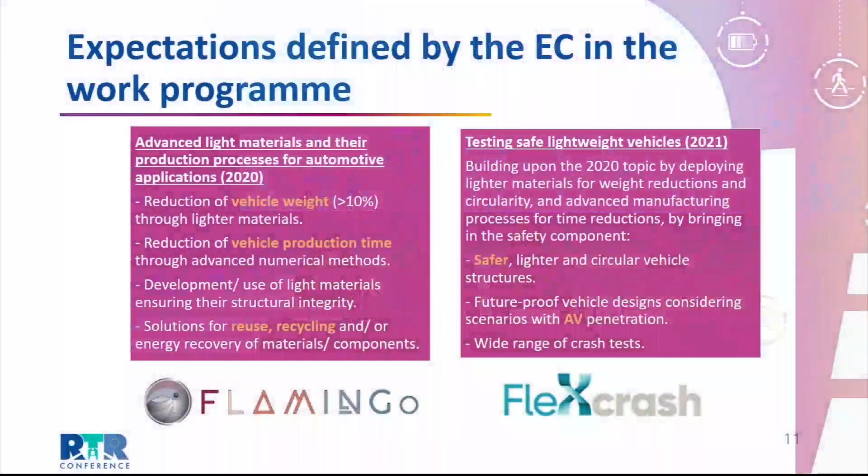There is a focus to better understand how materials from which we construct vehicles can be lighter, more circular, and overall greener. There have been two calls for that, one launched in 2020 and one launched in 2021. We see there is a follow-up: we started in 2020 focusing on trying to reduce the vehicle weight, setting the target of achieving at least 10%, but also reducing the production time and facilitating a faster production process.

Then the next year we have a new set of projects also focusing on lightweight and advanced materials for the automotive industry, but they also incorporate the aspect of safety. Safety, very specifically looking some years ahead, focusing on automated vehicles, what will be the situation there, what would be the safety issues, and how a car should be manufactured to tolerate those safety issues. So this is a bit of an overview.

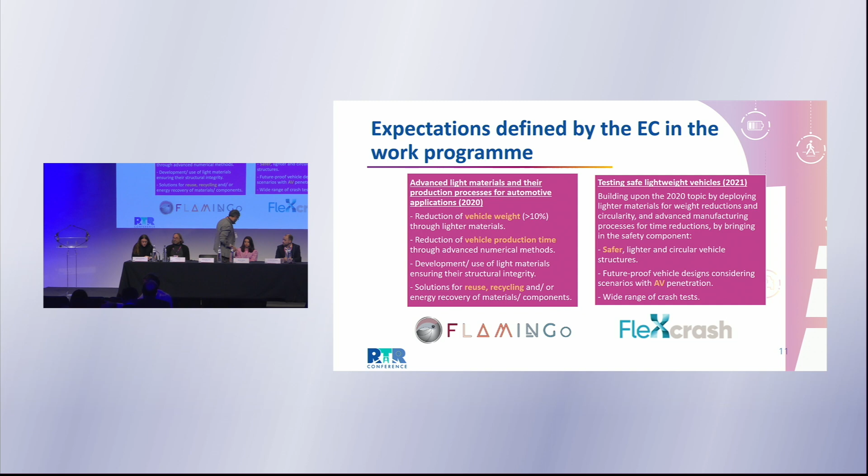Thank you. Good morning, everybody. FLAMINGo, as already said, is focused on bringing metal matrix aluminum nanocomposites into vehicles in order to identify the pathways to reduce the weight of the entire vehicle.

I'm here with my colleague Raquel Riccio who will talk more about the results in terms of LCA. But now a bit of numbers that regard FLAMINGo: we are 11 partners, and the project started 4 years ago and ended a few weeks ago.

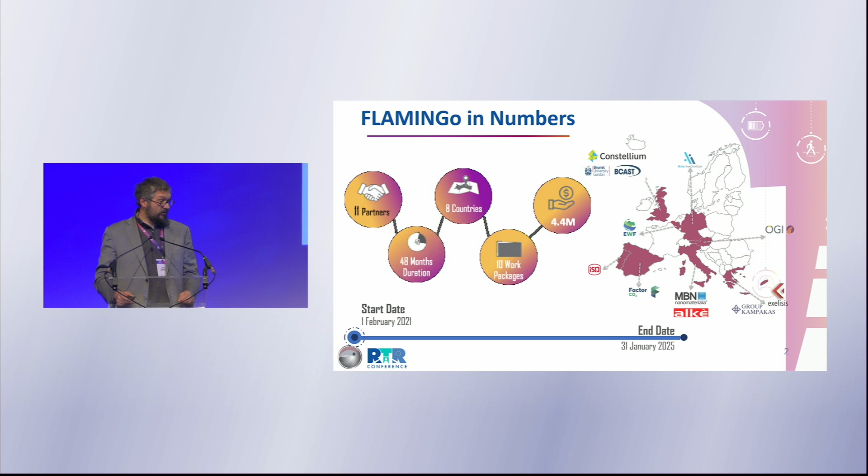This is a consortium in which there are a few universities, actually only Brunel university, and a couple of technology transfer research centers, one in Austria related to foundries, another in Portugal related to welding, and all the other partners are industries in the field of materials. That allowed us to have an overview of the entire life cycle of these materials and their implementation into the cars.

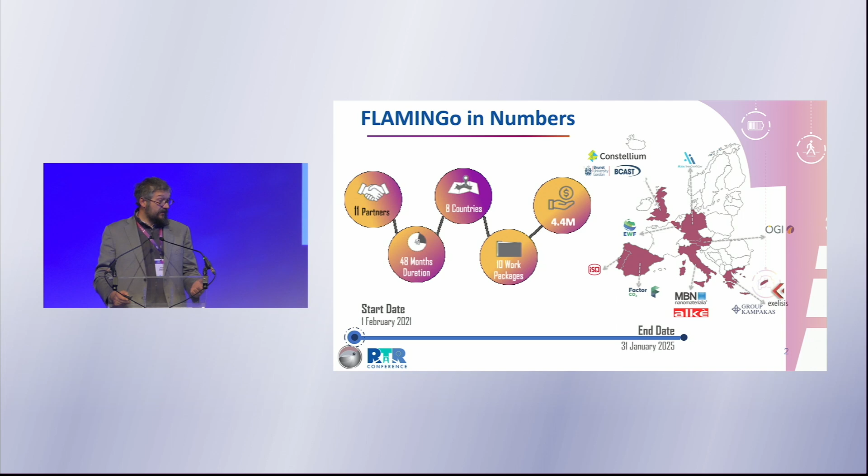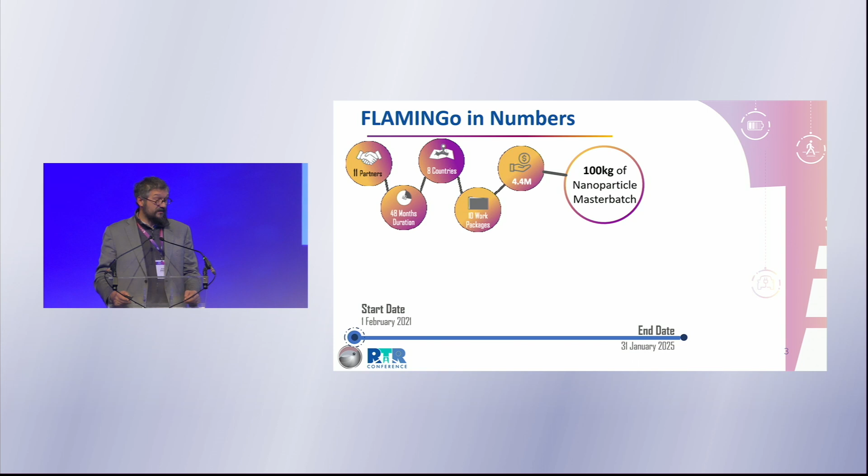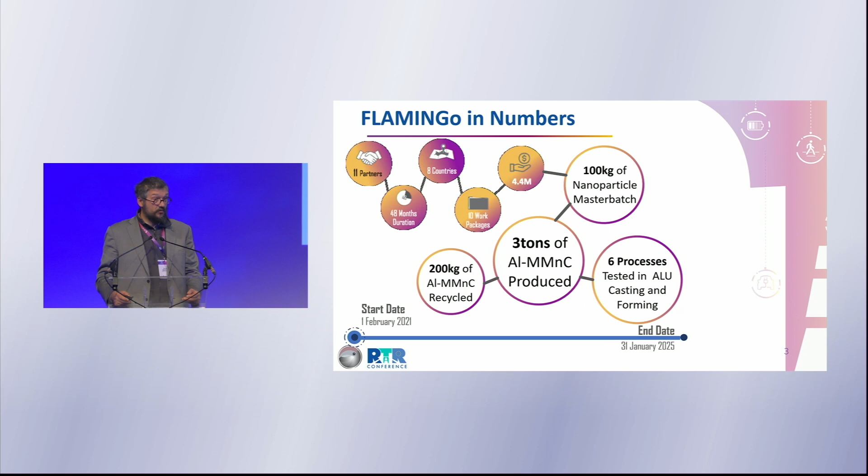Thanks to the fact that we are at the end of the project, I can give you also some more numbers. For example, 100 kilos of nanoparticle master batches have been produced, and this delivered 3 tons of aluminum metal matrix nanocomposites that have been produced and used throughout the process. Also, 200 kilos of these have been recycled to test all the implications around that, and 6 processes related to aluminum manufacturing and processing, casting and forming, have been used and tested throughout the project.

This led to a total of 4 components that have been installed in the vehicle. I have one of the components on the table there. It's a steering knuckle, and this allowed us to do some calculation on what was the actual reduction on the vehicle, and also some projection on what this can mean for the entire vehicle.

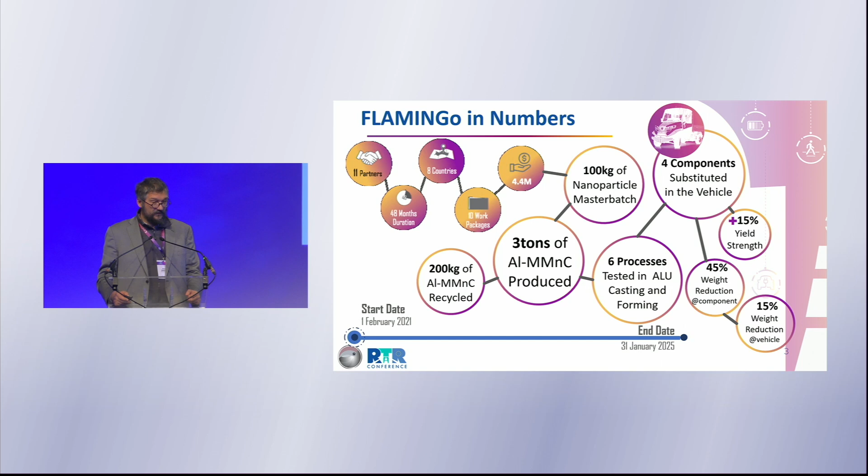At component level, we reached quite high weight reduction, but of course one component is not enough to reduce the weight for the total vehicle, since the target for this call was to reduce the vehicle weight by 10%.

FLAMINGo was focused on one material, which is the introduction of aluminum enhanced by inoculation of nanoparticles. The idea was we can substitute part of the steel structure, the steel component in the car, and obtain an actual quite substantial weight reduction.

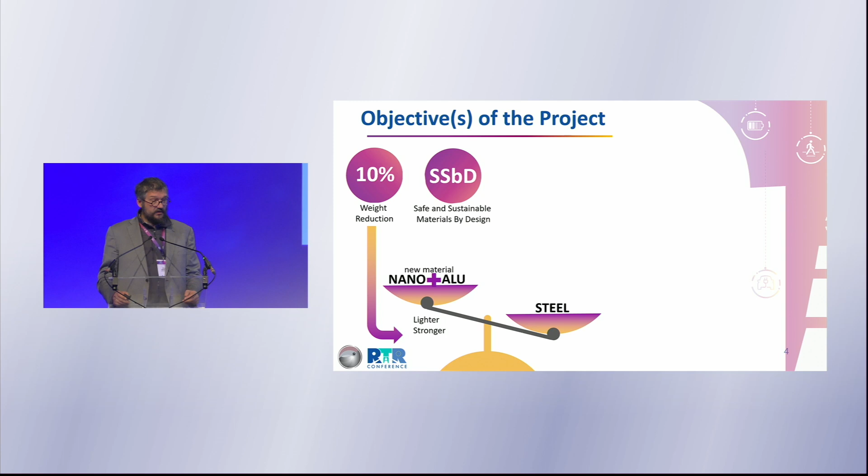But of course, the inoculation of nanoparticles brings a lot of questions around the safety for workers in the value chain of manufacturing the cars and manufacturing the components, and sustainability from the point of view of the cost of these nanoparticles. We had to test for this the entire manufacturing and life of these components, from cradle to grave and back to cradle. We wanted also, and we succeeded in including these components in a real vehicle and tested for some 100 kilometers.

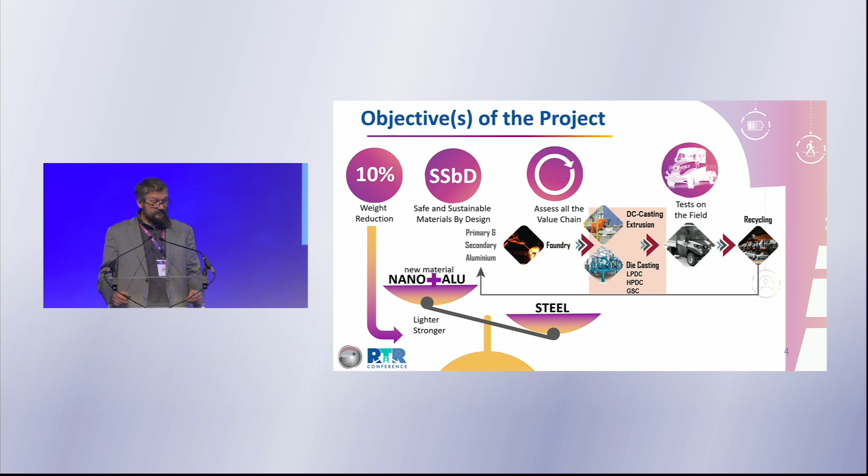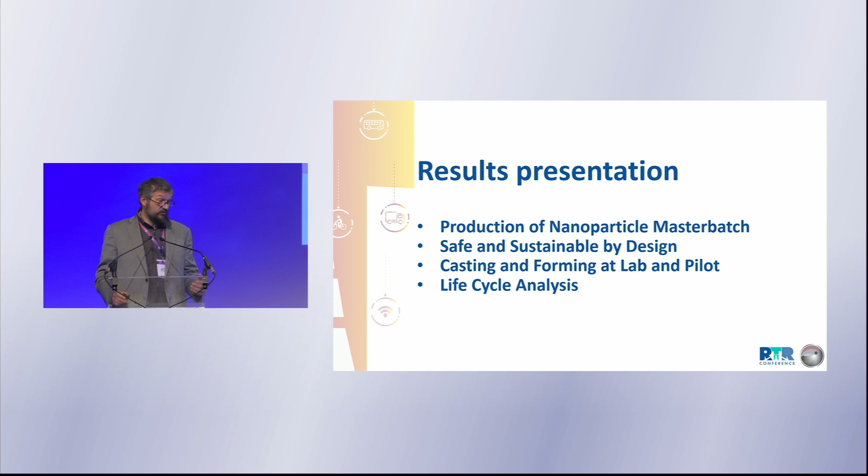So I will focus the rest of the presentation on some of the results that we achieved, because 4 years cannot be squeezed into 15 minutes. One of these is about the approach that we had.

Safe and sustainable by design is something that we wanted to exploit as much as possible. So we concentrated on 3 kinds of nanoparticles that were there since the conception or inception of the project. All of these had pros and cons.

Silicon carbide has good density compatibility with aluminum, but cost for the nanoparticles is quite high. Titanium carbide, on the contrary, is problematic from the point of view of density compatibility, but cost is lower because we managed to develop a process to make the titanium carbide particles directly into the metal matrix.

So we obtained highly concentrated master batches of aluminum with nanoparticles that can be safely inoculated in a different process of casting and then forging extrusion of aluminums.

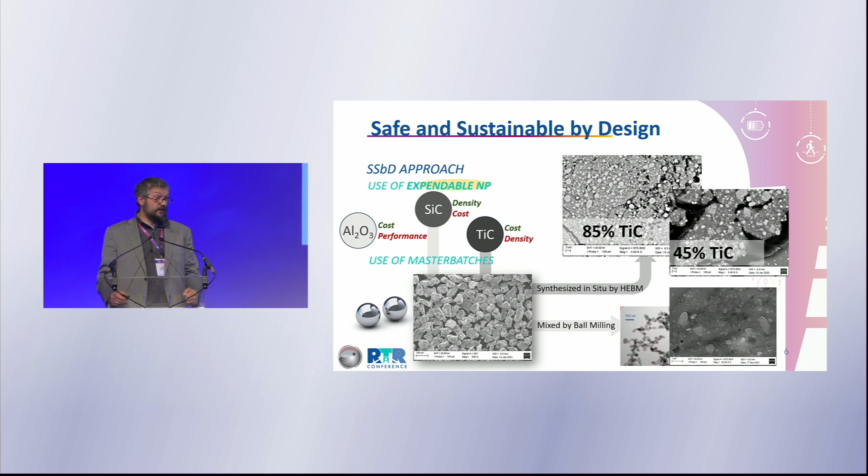Similarly, the idea is also to take on the market nanoparticles, silicon carbide in this case, and mix it with aluminum at solid state process, in order to create these master batches that can be, again, inoculated in casting and then forged and extruded.

This process, we as a company, dealt with. We used mechanochemical alloying at solid state, in one case, to create the nanoparticles of titanium carbide. In the other case, to obtain a predispersion of silicon carbide and aluminum. I didn't talk about aluminum oxide, which was scrapped quite soon.

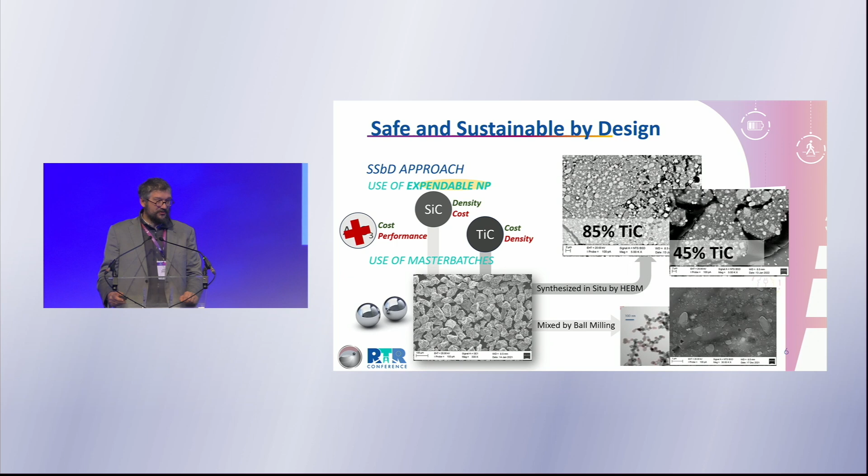In the project, we had to verify 4 hypotheses, one of which is that the addition of nanoparticles does not compromise existing recycling processes. We don't want to put in the market something that can mess up the currently existing practices.

So we want to check that these nanoparticles can be completely removed from the recycling process. For this, we planned to use expendable nanoparticles, something that we can waste during the recycling process without impacting too much on the cost of the entire approach to the material.

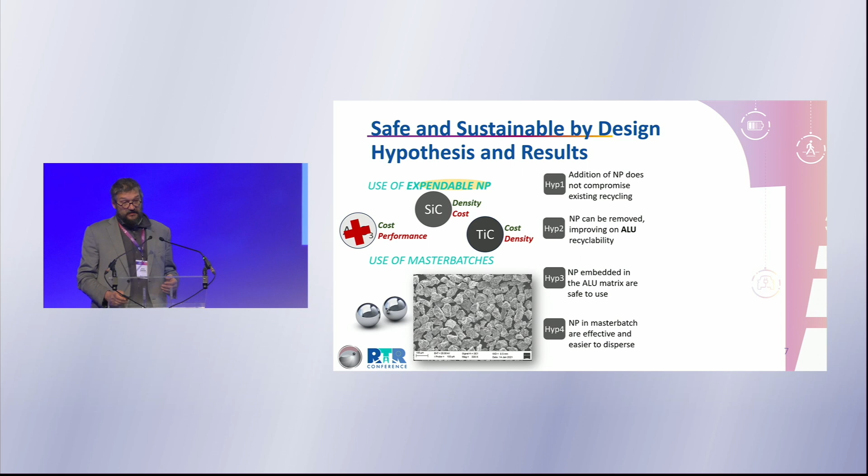Then we want to verify that using these embedded nanoparticles in master batches is safe throughout the different processes, and that the use of these master batches is effective in predispersing the nanoparticle.

On the first point, we reached quite good results. Conventional recycling, we proved, is sufficient to remove the nanoparticles.

As regards safety, we also got good responses in the sense that we managed to monitor all the steps in which nanoparticles and master batch are used. This is the making of the master batch, the inoculation during casting, the use in LPDC, low pressure die casting, and the use of these master batches in direct chill casting, the extrusion process, and also the recycling process.

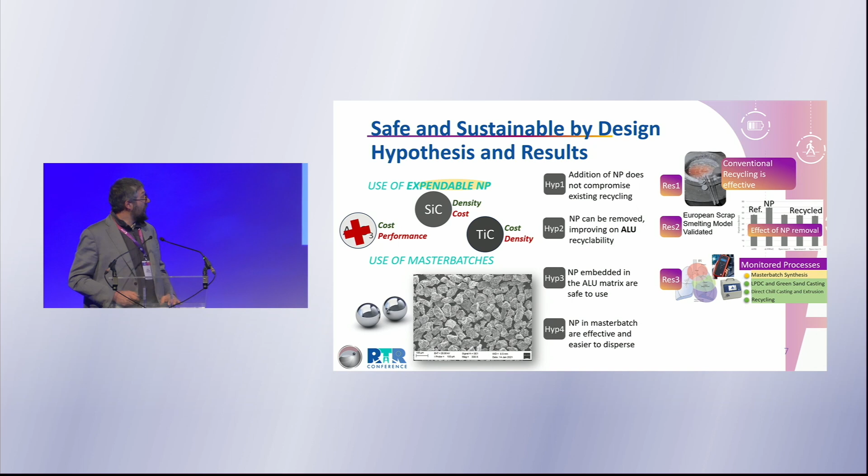We had a partner monitoring the release of nanoparticles in each of these processes, and what we saw is basically that there is no difference from normal practices. The same amount of dustiness and nanoparticles monitored in standard processes is seen in the processes using this addition of nanoparticles.

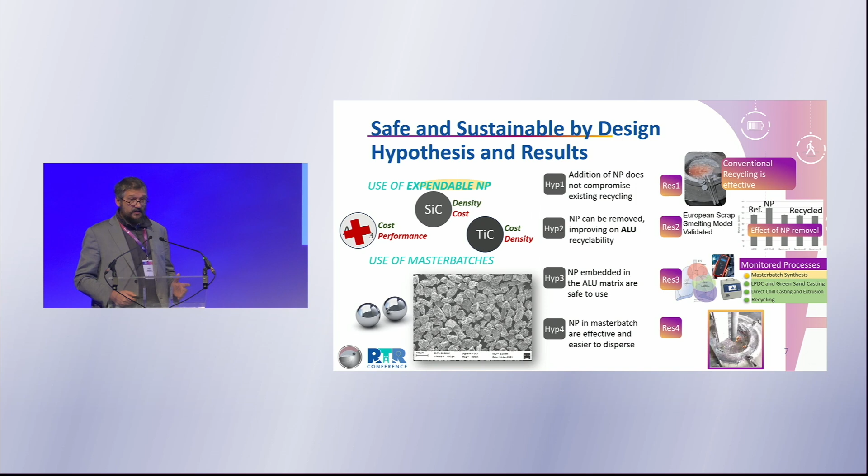As regards whether it is effective as a pre-disperse means, there isn't space enough to answer this here. This is just some of the lines of activities that have been performed in the project.

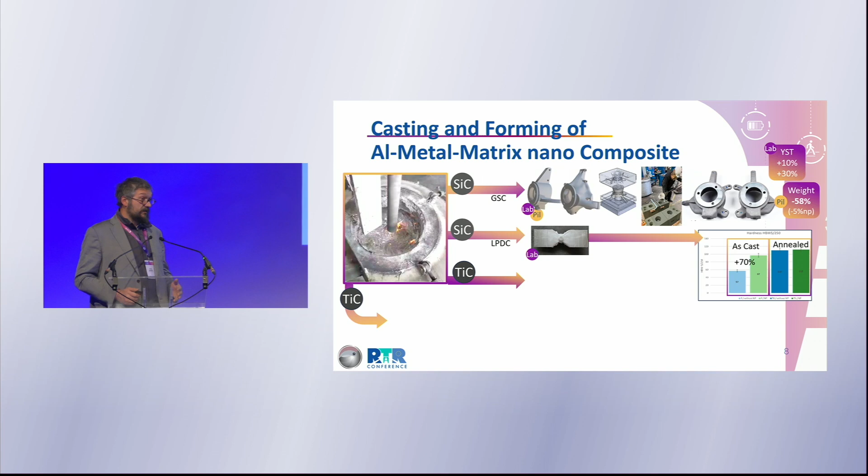Once annealed, this difference is lost, because the aluminum alloys are originally designed to refine the nanostructure through annealing.

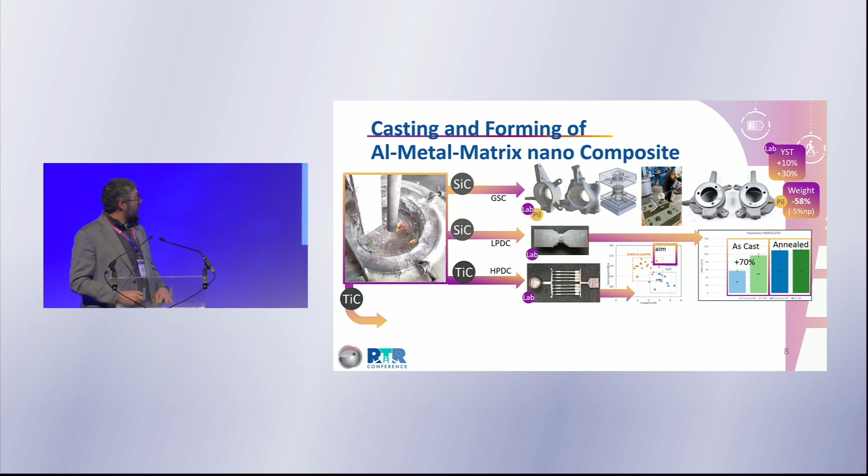So basically the nanoparticles we were inoculating are competing with the ones obtained during the annealing of the components. We tested titanium carbide on high pressure die casting. We missed the aim area in which we were planning to arrive in terms of properties of yield strength and elongation.

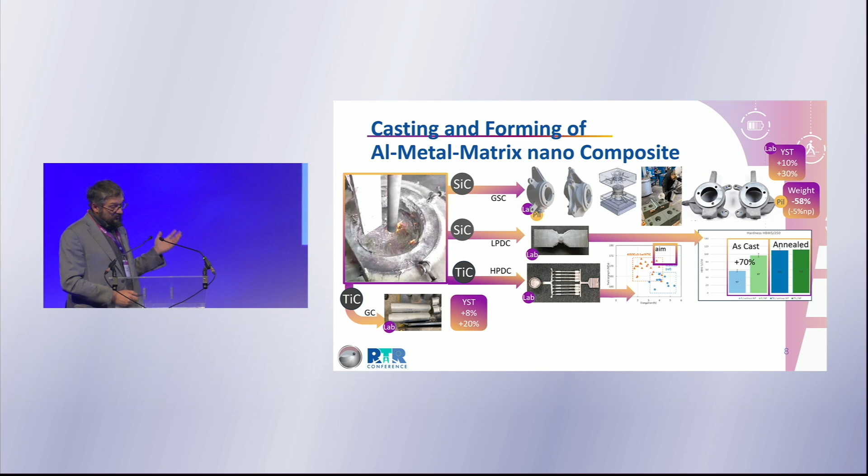And then we got good results in terms of gravity casting, with yield strength increase of about 8 and 20%, but we couldn't translate that properly into the DC casting.

This was a problem related to the actual manufacturing process. So instead of having the correct number of nanoparticles in the alloy, which is around 1%, we ended up with a bit lower amount. So the final properties of the material were not the same as the lab scale one.

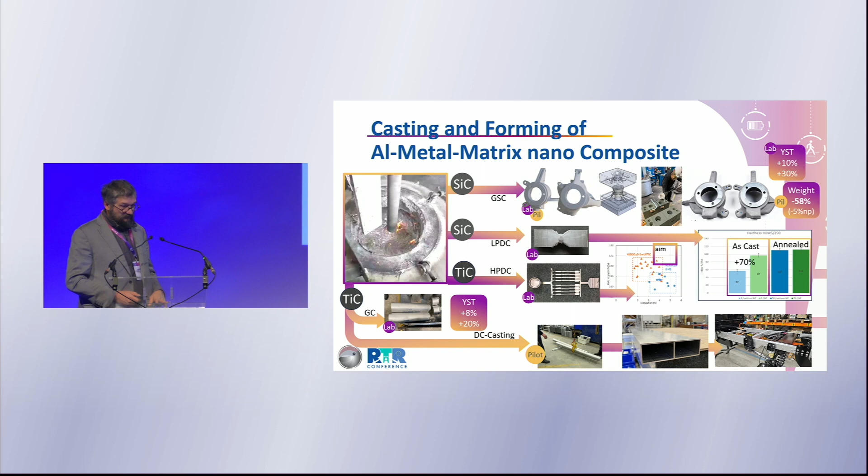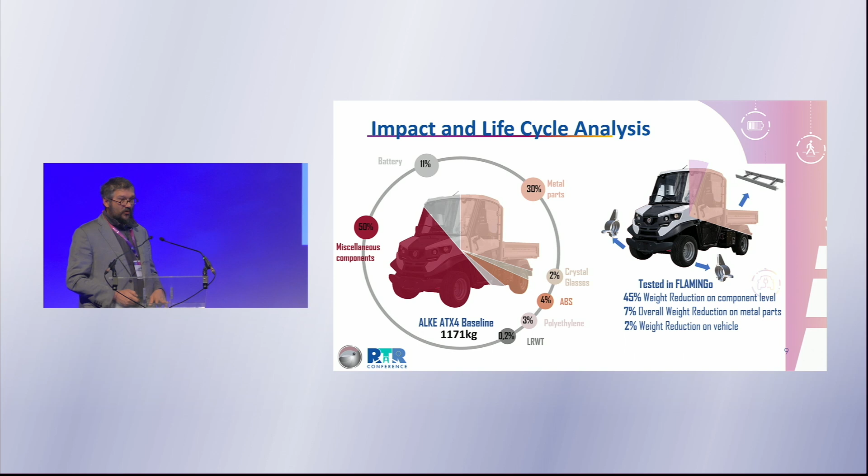So now I'll leave the floor to my colleague to talk more about what we calculated from the LCA point of view on the vehicle and the concept around it.

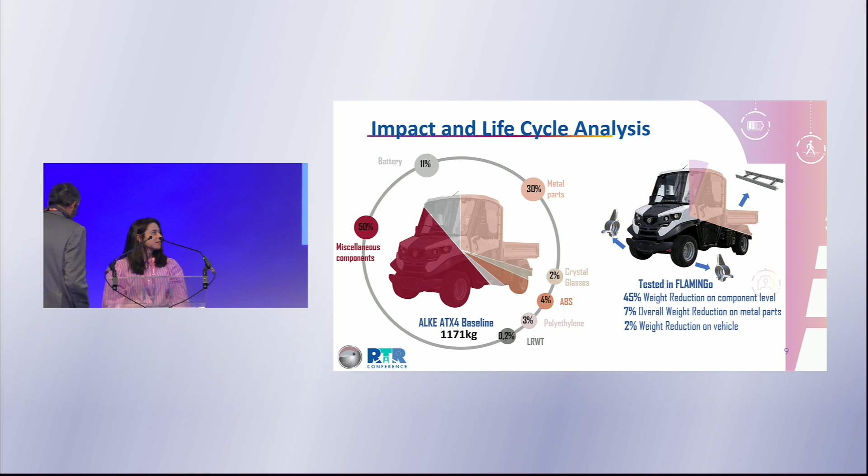Yes, hello everyone. I'm Raquel Recia. I work in Global Factor, and I was in charge of developing the life cycle assessment in work package 8 of this project.

So here we have the vehicle that we analyze. One of the main objectives of the project was, on one hand, to analyze the environmental impact of the demonstrators that were developed during this project, which were two steering knuckles and one rear frame.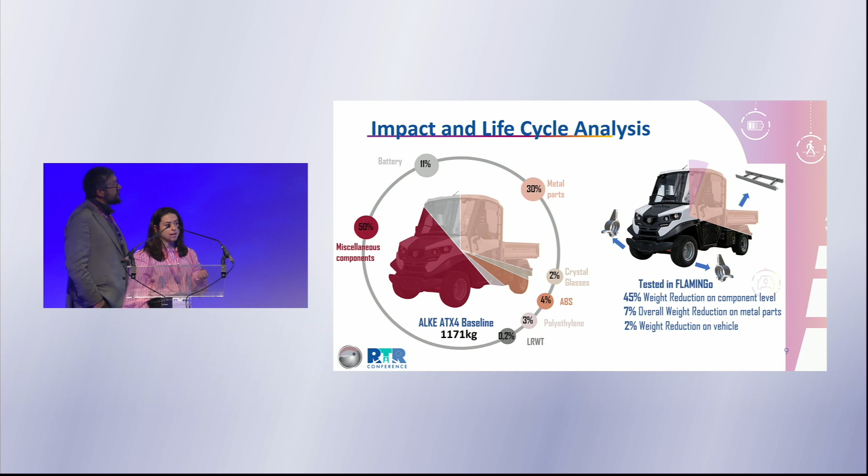But we also analyzed the life cycle assessment considering the whole life cycle of the vehicle, so we considered not only the manufacturing side, but also other phases like the assembly phase, the use phase considering the electricity consumption of the vehicle, and the end of life.

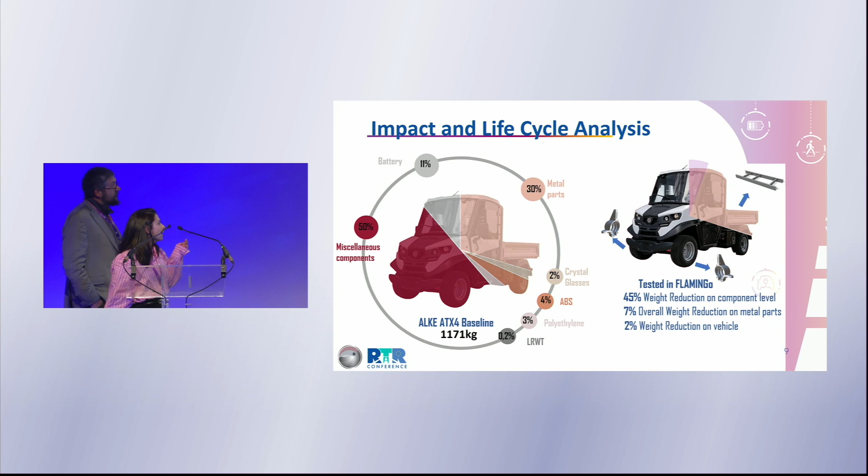So here we have the base scenario, that is the ATX4 vehicle with a weight of 1,171 kilos. This is the base scenario composed of steel metal parts.

And then we have the FLAMINGo approach, where the two steering knuckles and one rear frame were replaced. Doing this replacement, we achieve a 45% weight reduction on component level, a 7% overall weight reduction considering the metal parts, and a 2% weight reduction considering the overall vehicle's weight.

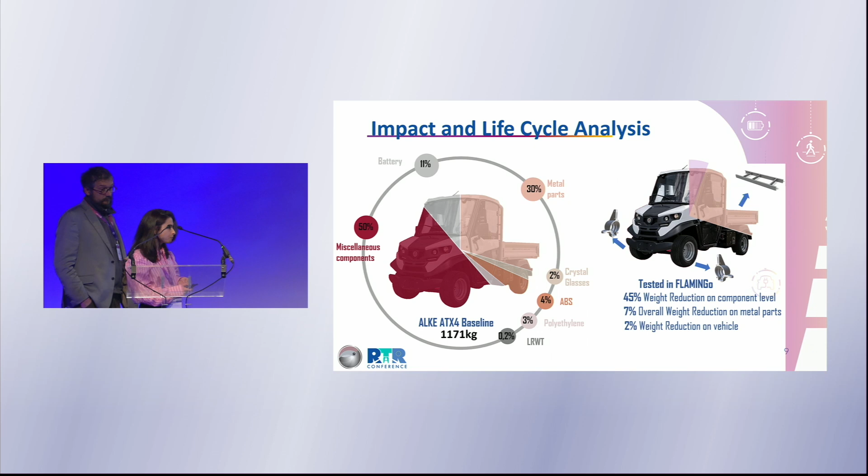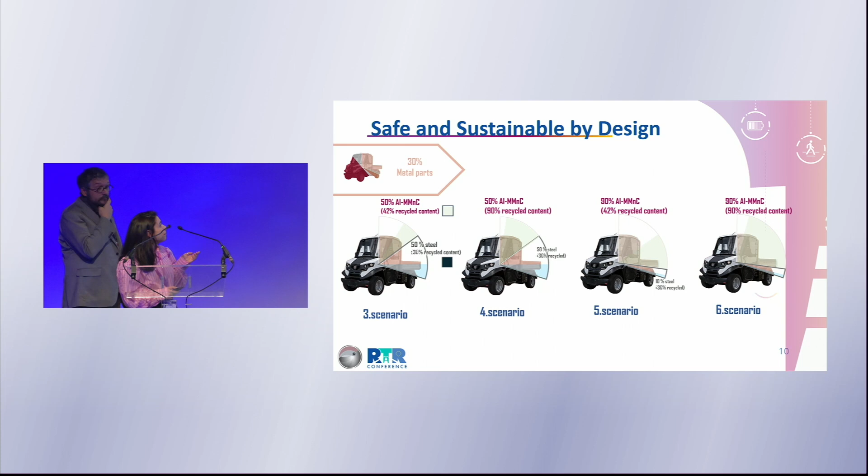So then one of the main objectives was to analyze the influence of replacing the steel parts in the vehicle. So we developed 4 more scenarios or analyses, where we changed the type of metals on the metal side of the vehicle.

So in the third and fourth scenario, we consider a 50% substitution with aluminium metal parts. The main difference between the third and fourth scenario is the recycled content of aluminium: in the third scenario we have a recycled content of 42%, and in the fourth scenario 90%.

Similarly, in the fifth and sixth scenario, we conducted an analysis considering a 90% replacement of the metal parts with aluminium nanocomposite, and as with the third and fourth scenario, we varied the recycled content of aluminium from 42 to 90%.

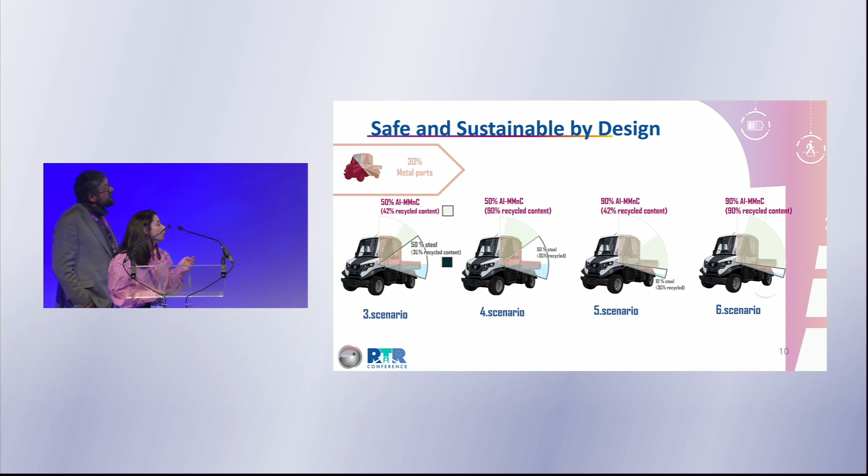We estimated it, and if we move to the other scenarios—third, fourth, fifth, and sixth—we can achieve more reduction, in this case from 15 to 22%.

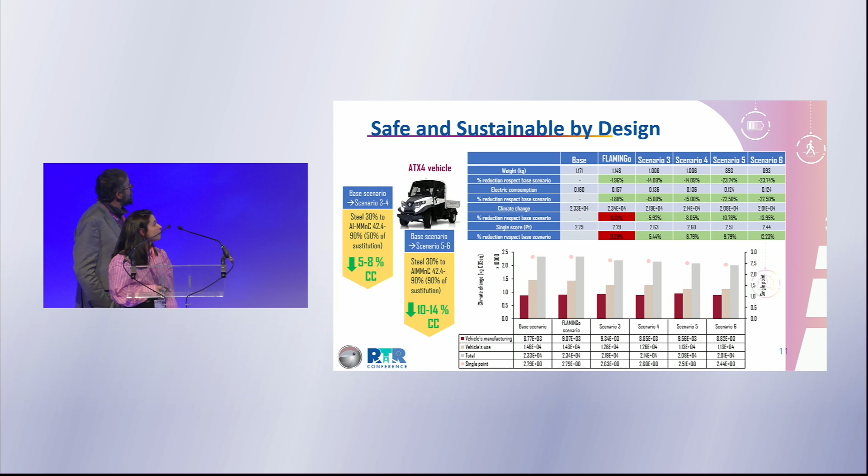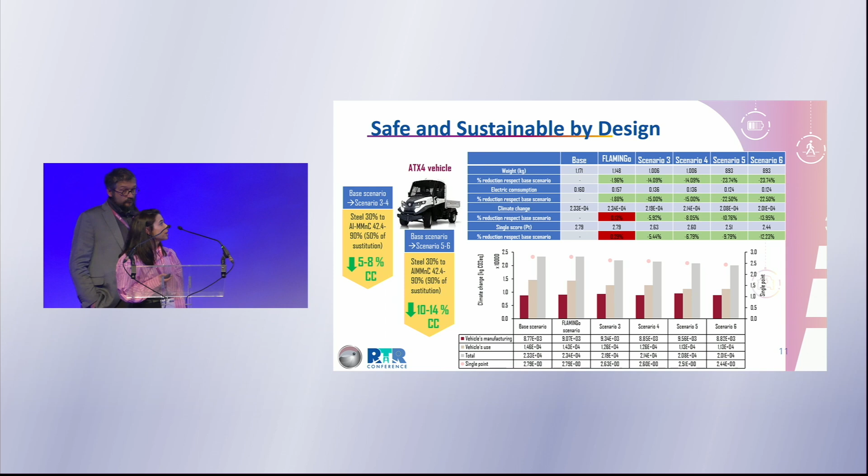And then, if we look at the environmental impact, we can see that the FLAMINGo approach has a slight increase in the overall impact. This is because the manufacturing environmental impact of the aluminium part is higher than that of the steel part.

But if we take into account the whole life cycle, we can see that the use phase is one of the main contributors to the life cycle assessment. So if we can achieve a reduction in weight, we can also achieve a better environmental performance in the overall life cycle. Thank you.

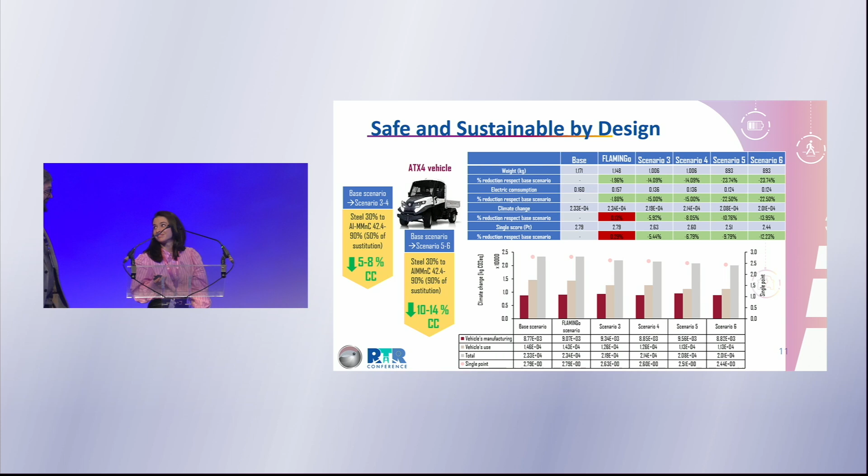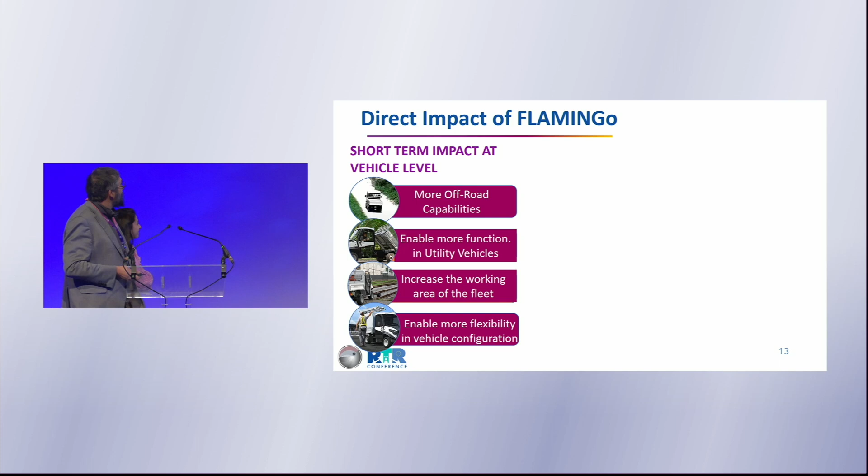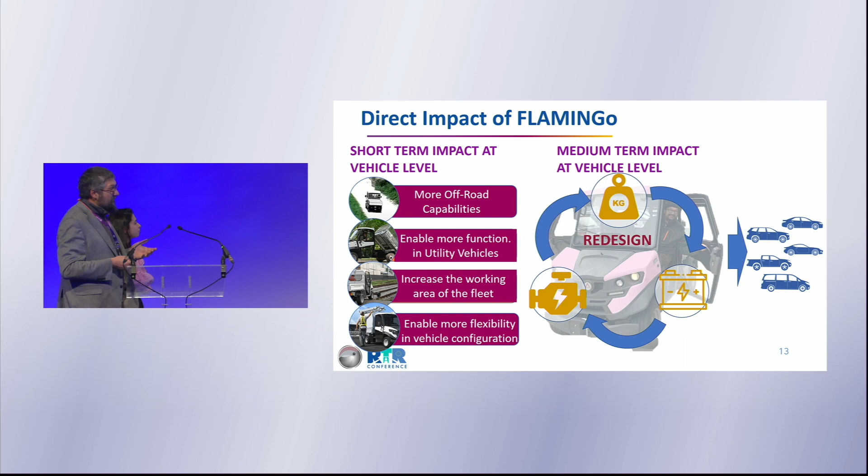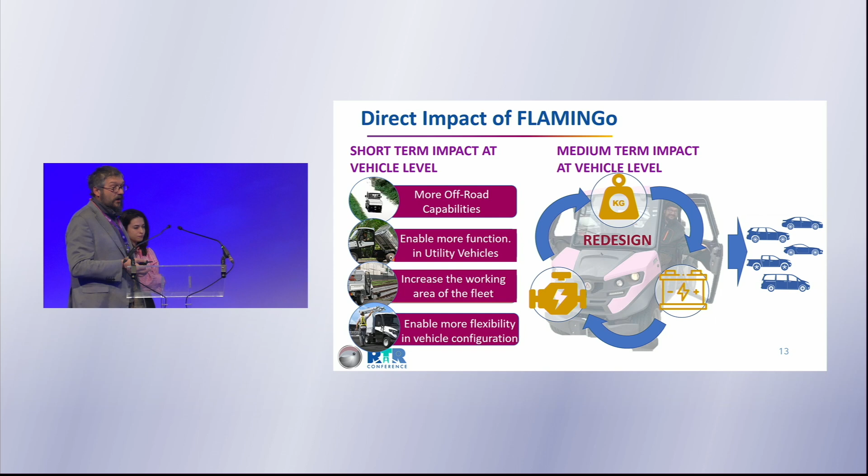So the impact that we meant to arrive at is to allow a sort of redesign of the vehicle. All the figures that we have shown about LCA are specifically tailored on this kind of vehicle, but we preferred to have a specific vehicle to do all the tests in order to be quite realistic on the outcome.

So the weight reduction is just the tip of the iceberg in terms of what we achieved. What we achieved also was establishing guidelines for the use of this kind of materials, starting to interact with the standardization bodies in order to have changed also the way to speak, a way to recognize this kind of materials.

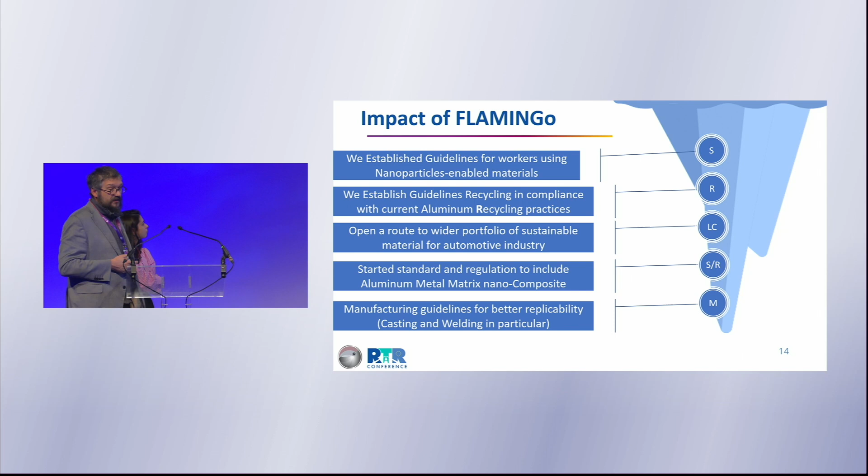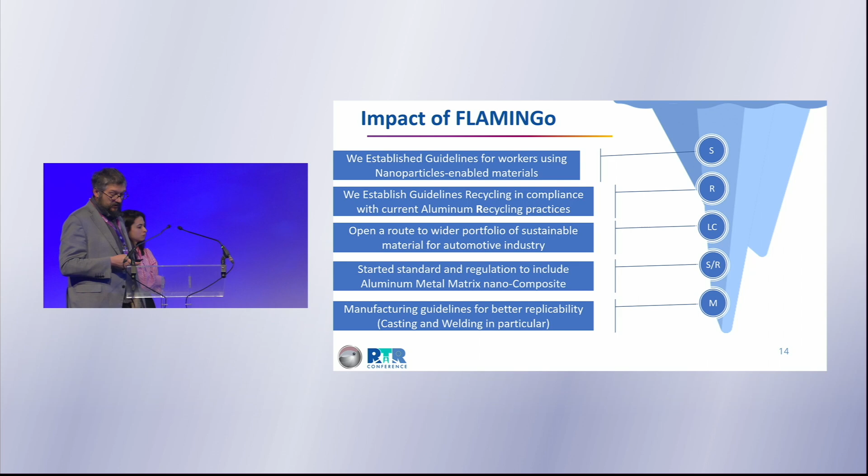And we proved that including nanoparticles as a strengthening means is not problematic for most of the processes, not for the recycling, and also the safety around the use of nanoparticles has been tested, and it is positive.

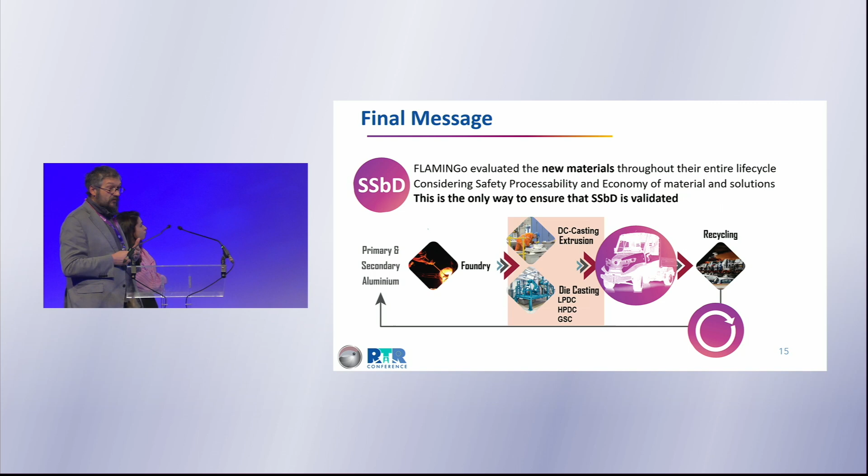One last message is that introducing a new material really has to consider the entire life cycle of this material. In this case, it's in the vehicle, and going through all of this allows also thinking about the different interaction of the different processes and optimizing the material in a global view.

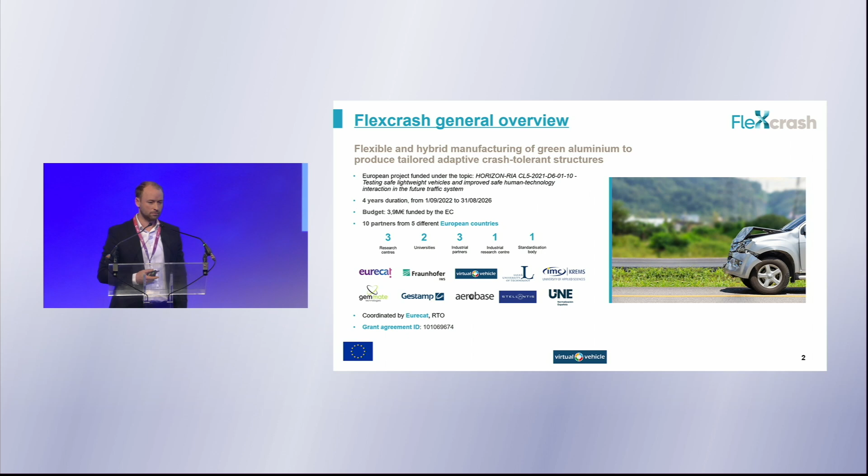So, general overview, where we started. We started nearly 2 years ago, so we are a bit over half time. We have a budget of about 4 million euros, with 10 partners from 5 different countries, a quite good mixture from research institutes, universities, and also industry partners. It is coordinated by Eurecat, so I stepped in here for my colleagues from Eurecat today, and will present our preliminary results from 2 weeks ago.

So where are we now? What are we doing? We try to use recycled material in different front-end crash structures, and use this material in different manufacturing technologies. So we want to combine and hybridize different production ways, different production paths, with an innovative manufacturing approach. And we use, as I mentioned before, recycled aluminium to do that, so that we can also be more sustainable for future crash scenarios, or for future crash structures and components.

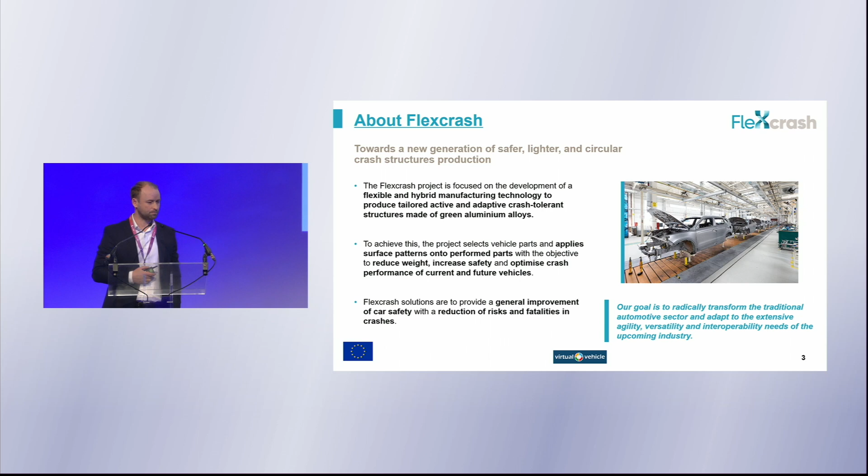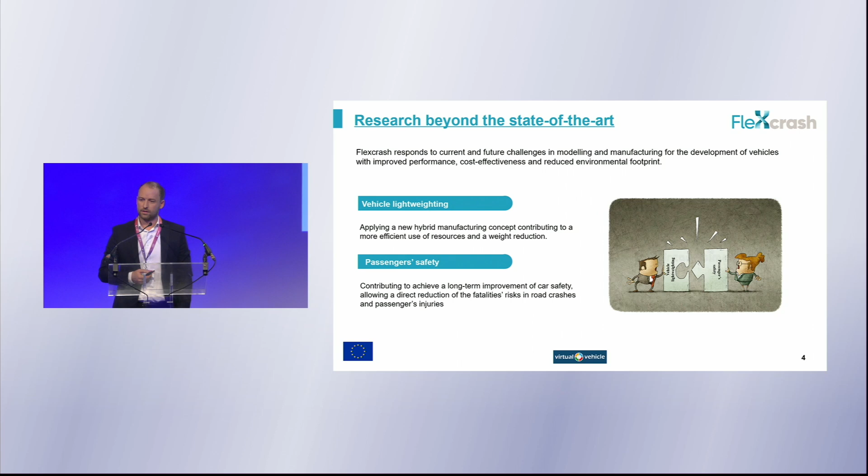So what is the research beyond the state of the art? We have two different main topics that we want to tackle in the FLEXCRASH project: vehicle lightweighting and also passenger safety. The problem with these two focuses is that vehicle lightweighting and passenger safety didn't fit together. So when you're doing lightweighting, especially on the structural side, passenger safety decreases because weight is always the best point to save passengers, to enhance passenger safety. And when we lighten the structure regarding lighter materials, optimized structures, and so on, we have to rethink a bit the safety concept. We want to do that with this manufacturing approach, which I'll show in the next slides, and also with an active and adaptive system in the car that enhances passenger safety.

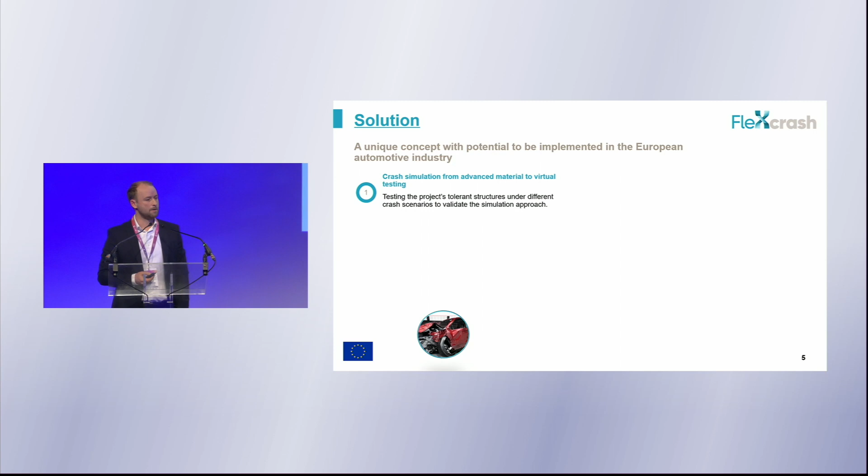So what are the objectives or the solutions we are working on? In total there are 5. The first one is crash simulation, to enhance design and component design, and to speed up the development process—you have to be quite precise, quite predictive, to have a forecastable crash simulation on these used materials. The second point is, as mentioned before, the flexible and hybrid manufacturing processes with these newly adapted materials. The third point is the outcome, so new crash-tolerant structures with an adaptive or active system in it, and also lighter and safer for the passenger and for the vehicle. The fourth point is advanced testing.

So when you're using a new material, especially recycled materials, you have to possibly rethink the testing procedure on coupon level, also on component level.

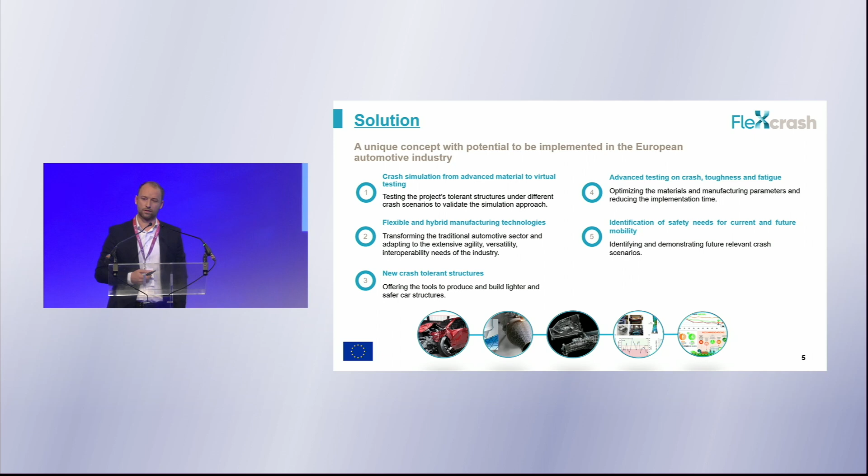And the fifth point is then the future needs for these crash structures, because of an evolving world with ADAS systems and more autonomous vehicles in the traffic, we will have to rethink perhaps some of these crash scenarios. What we also did there in the survey and in the research from former EU projects, and that is also part of the FLEXCRASH project, is to show how these crash scenarios could change in future and how to react on this change.

So the first topic is the future relevant crash scenarios. What we are looking at there is how these scenarios will change in future mixed traffic in a city scenario, how these severities will change, how the speeds will change.

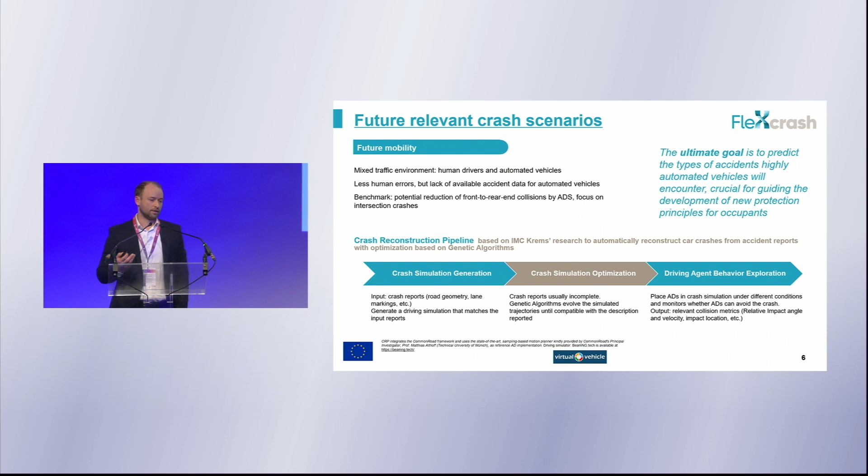And therefore, the project partner from IMC Krems designed a scenario generator filled in with crash simulations and data from actual situations, then improved it with other systems, with different autonomous driving scenarios, and from this scenario generator we evolved to different scenarios.

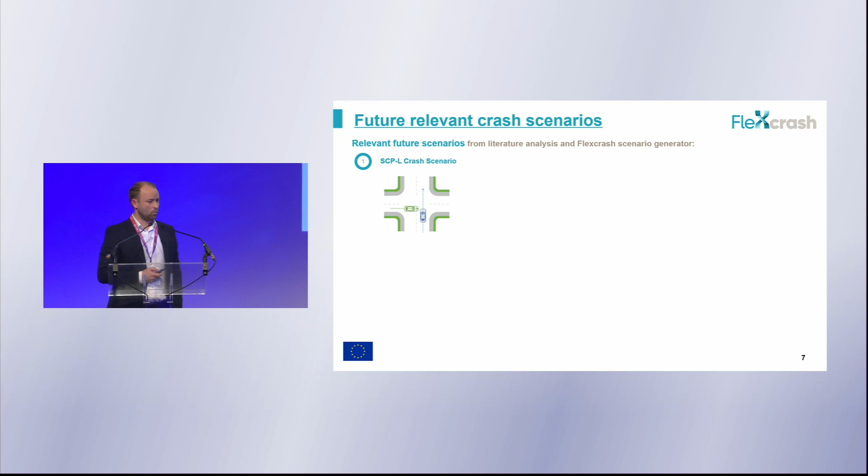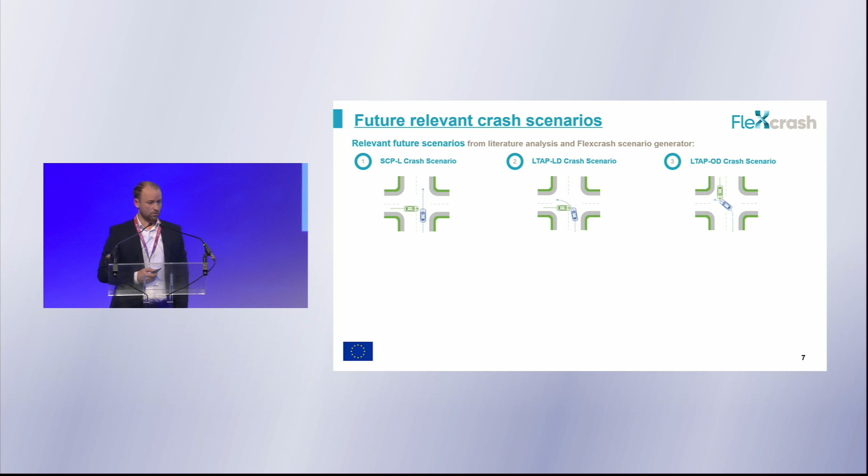So what could be relevant future scenarios that we have to react on? We find there are 3 different crossing scenarios which could be an issue in the future, or even more severe in the future. So these are the 3 scenarios, and we configure these 3 defined scenarios to test our front-end structure that we will develop and optimize. So that's one of the points.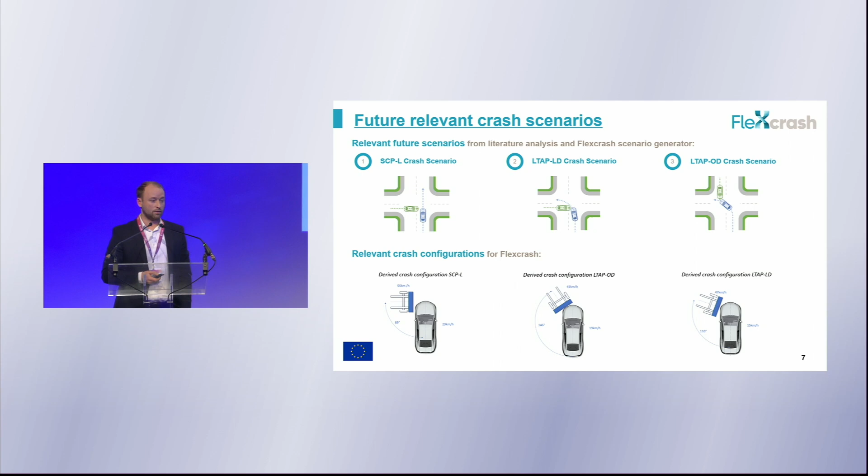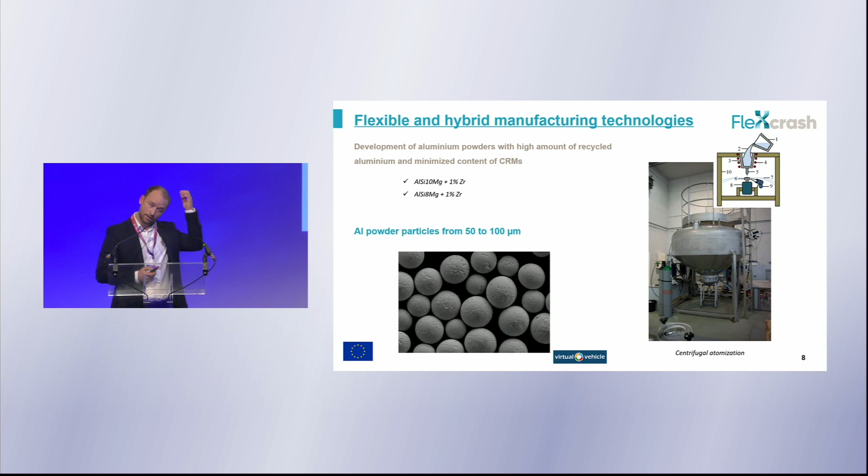The second point is the manufacturing part of the FLEXCRASH project. We will try to hybridize these manufacturing technologies. We use on one side high pressure die casting and extruded profiles that we want to adopt with 3D printing technology to enhance and optimize the crash performance and also lighten up the design structure. Therefore we have our project partners from Eurecat and also from IWS Fraunhofer who are working on this manufacturing part. Here you can see some examples of the optimization process with these 3D printed recycled materials, which is actually ongoing.

And with these manufacturing technologies, with these optimized structures we can develop, we are thinking that we can lighten up the front end structure, and also enhance the passenger safety.

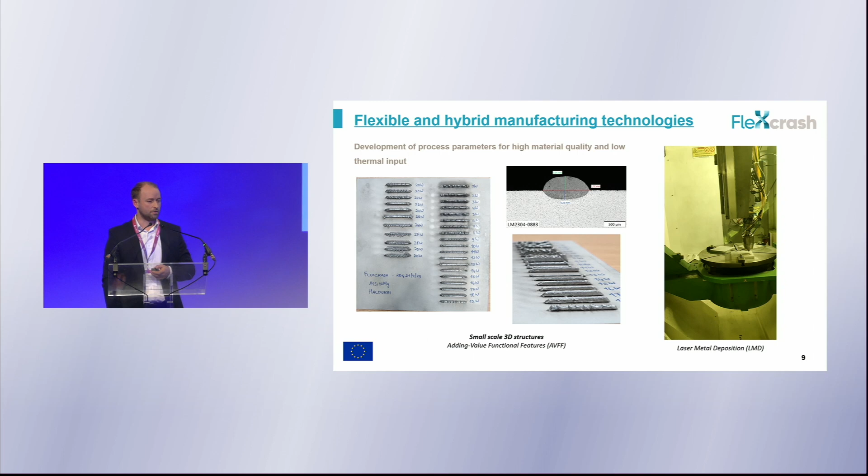Also one part of the designing process, as mentioned before, is the virtualization. So we have to prove that our simulation models, the methodologies, the tools that we deliver to our project partners are, on one hand, accurate, and on the other hand, that these simulation tools are robust and predictive.

And what we can see here is just one front-end part. At the upper side, it's a normal extruded profile. The lower one is with a 3D printed pattern on it, just a few lines, for example. And we can see here an improvement of about 30% on energy absorption on just this one part.

And we are actually working on different patterns to optimize these structures regarding different crash angles, regarding different crash scenarios, and then use that, as also mentioned in the topics before, to test it on coupon level, to see the performance, to take a look at how these 3D printing technologies influence the base material, and in the end optimize the front-end crash structure.

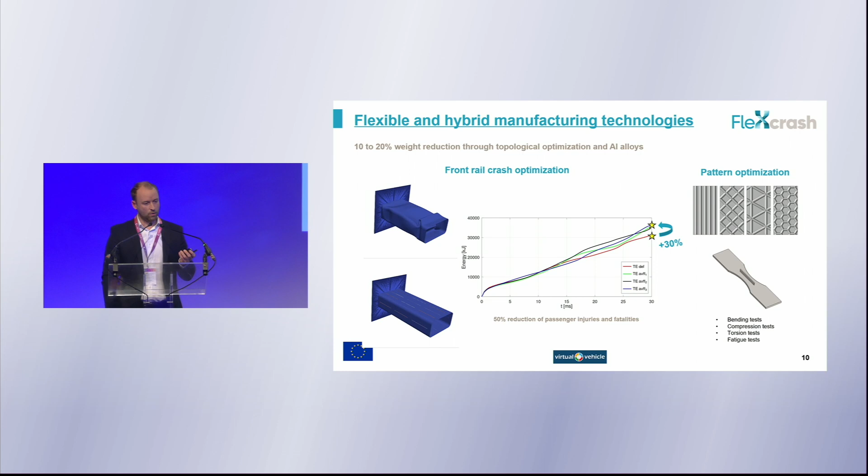What are the mid to long-term impacts that we want to generate from the FLEXCRASH project? On one hand, the adaptation to the future crash scenarios. So nowadays you have these passenger safety regulations that we have to fulfill, but in the future mixed traffic scenarios, these scenarios will become extremely large.

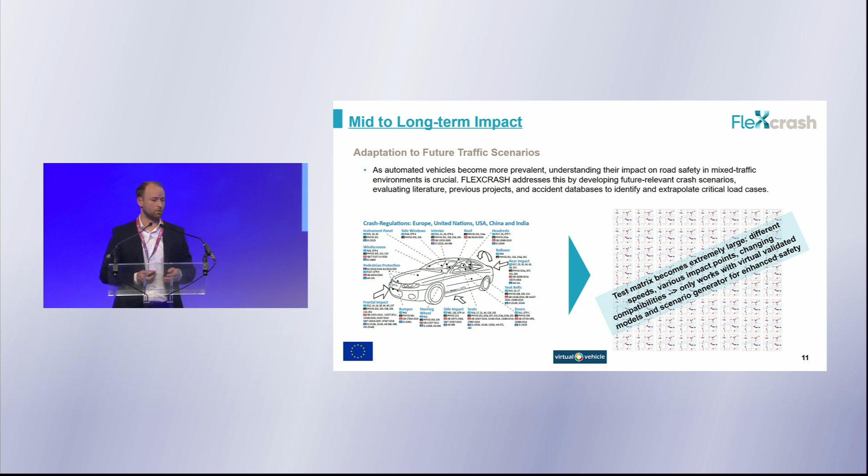You cannot test all of these. You have to simulate it. You have to prove that your simulation is correct. And the only chance to fulfill such large testing requirements is a virtual validated model, and perhaps a scenario generator like we created, to enhance the safety of a future vehicle or component.

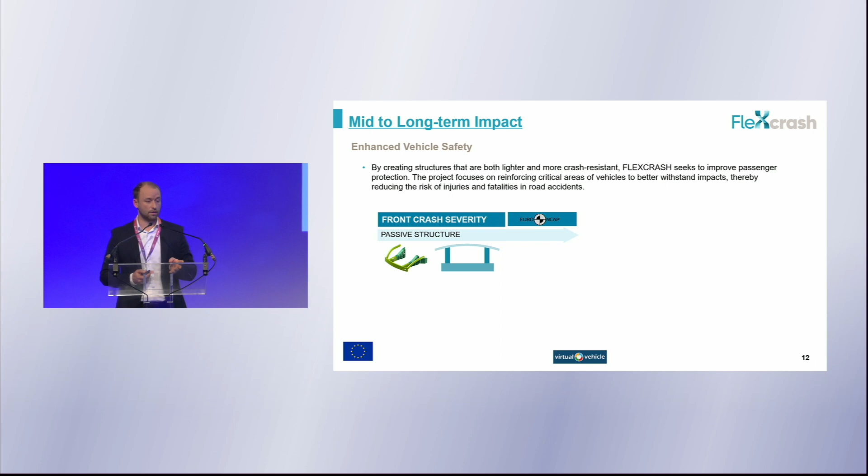The second point is to enhance vehicle safety itself. So in FLEXCRASH we try to improve the passenger safety with two different approaches. One of them is the passive safety approach, so we want to optimize the passive crash structure. The second part is this active system that has to be integrated, which we are actually working on.

So this is an ongoing process. We do not have so much data actually, but we want to combine these two worlds for pedestrian safety and occupant safety, and this is one of the mid to long term impacts.

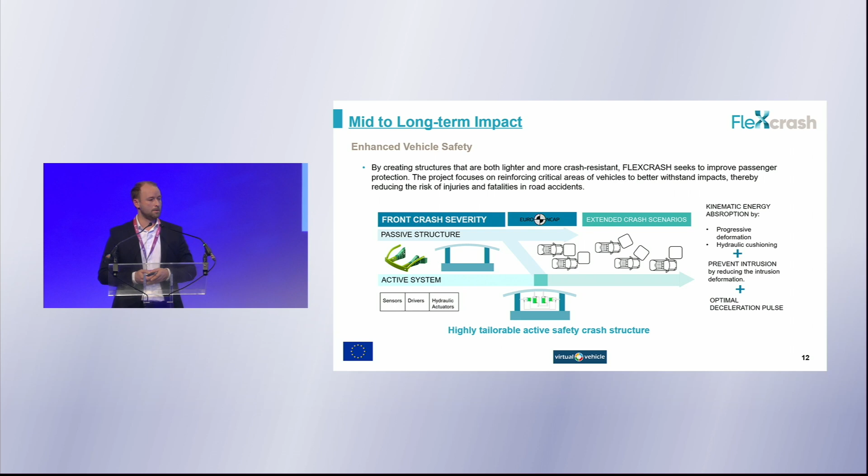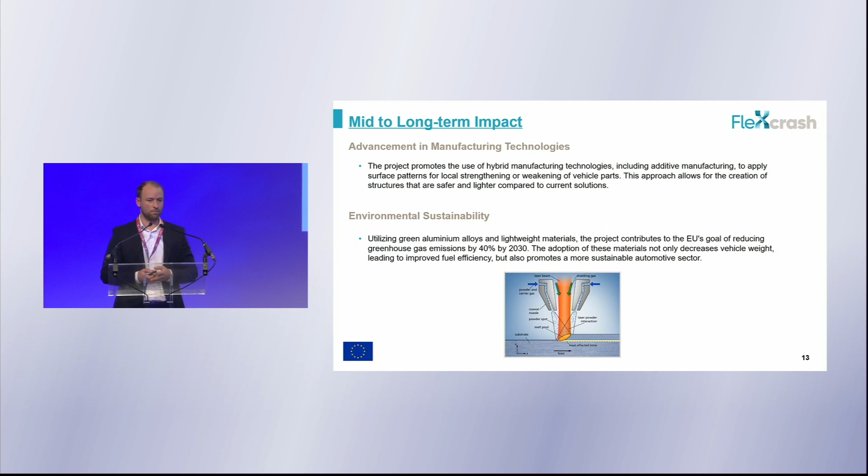And at least we have two impacts on the manufacturing technology, to optimize these manufacturing technologies, and also on the environmental side, the sustainability by using recycled aluminium. So these are our preliminary results from the FLEXCRASH project, and thanks for your attention.

Before we continue with the panel discussion, I wanted to see if anyone from the audience has a question for the speakers.

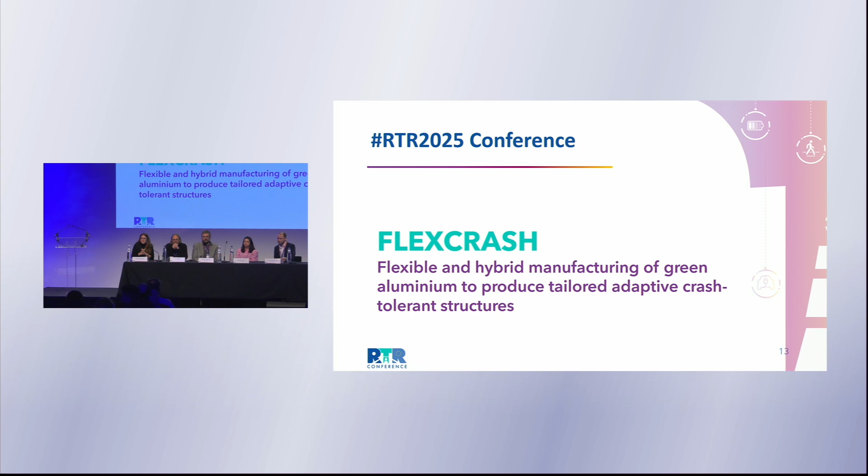Yes, please. Is there a mic? There should be a microphone. Lucy, he's here. Yeah, with the light we cannot see.

Thanks, it's Fernando Sanchez from IMEM. It's a question for FLAMINGo. First of all, thanks for the presentations, very interesting. In the case of FLAMINGo, a question about the distribution of the nanoparticles - has it achieved good results in all the casting processes you have tested? And the second question is about the welding processes you mentioned testing - could you explain the results of welding these materials?

Thank you for the question. We optimized the dispersion on all the casting systems using ultrasonication and special stirring. The one with which we struggled more was the direct chill casting, simply because the material is poured into the mold, and with that system we were using titanium carbide, which has a density problem. It basically was sinking before actually being delivered into the mold, which is why we ended up with a lower percentage. But in terms of dispersion, it was sufficient to obtain the enhancement on the mechanical properties that we hoped for.